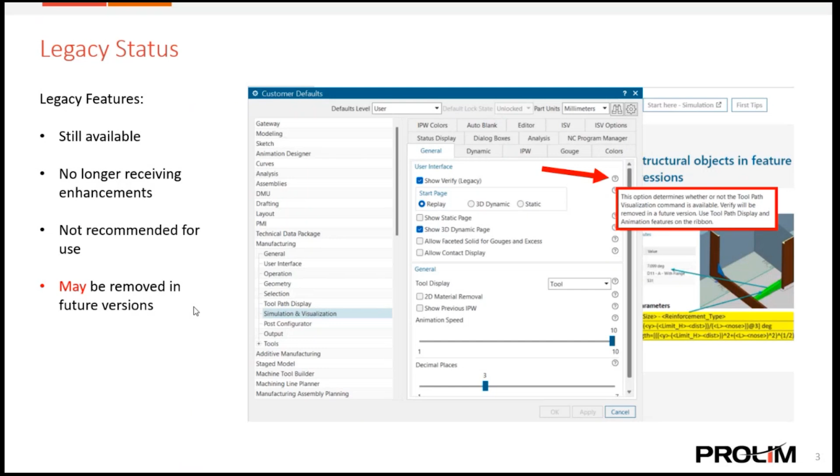Now moving on to the toolpath visualization method, we can quickly go over the current options. The initial pop-up that will appear is the replay option. Because it does not include material removal, this is the faster animation method. On the right is the 3D dynamic. This option does include the material removal and includes more options to account for that.

I will go over these options more in depth next, so to briefly introduce the common options between replay and 3D dynamic: we have path listing, which lists 9 path motions at a time, a list slider to go between the different path motions, a feed rate display, a tool display, a toolpath display with the number of motions, an animation speed slider, and the animation controls.

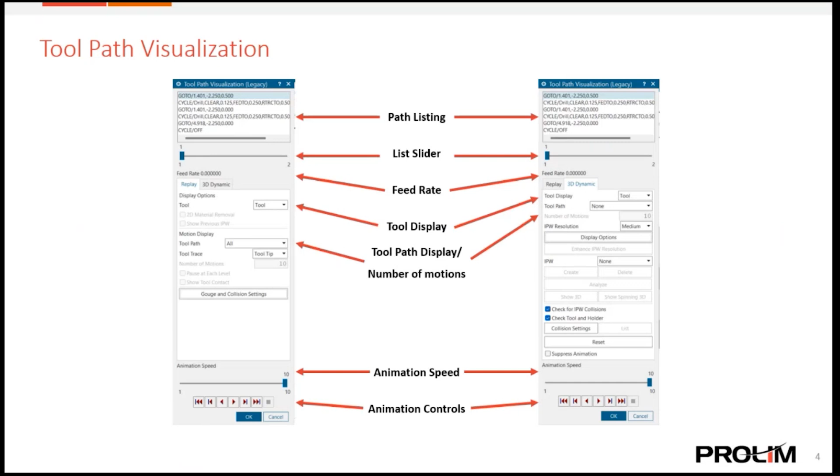Now we will view this in NX. Now that I have NX open, let's begin by locating the legacy toolpath display.

As long as the toolpath verify is left on in the customer defaults, it can be found by selecting an operation under Home, Operations, Verify Toolpath, or by right-selecting the operation, dropping down Toolpath and selecting Verify. Or when editing an operation, it can be found in the Actions under Verify.

So let's open this up and take a look at the options one more time. Here we have the path listing with the path listing slider.

And under Replay, we have an option for the tool display and the toolpath display. We also have gouge and collision settings, where we can check for gouges and check for collisions against the tool and holder. And we also have tool shape for checking, where we can change it from tool parameters to a solid assembly. We can also change the gouge check stock from automatic to user defined.

And we can display the gouges and list them when finished. Under 3D dynamic, we have the same tool display and the toolpath display. We also have options for the IPW resolution and its display options.

The IPW can also be saved out either with the operation or with the component. It can be created, deleted, or analyzed. And we can show as 3D or show as spinning 3D.

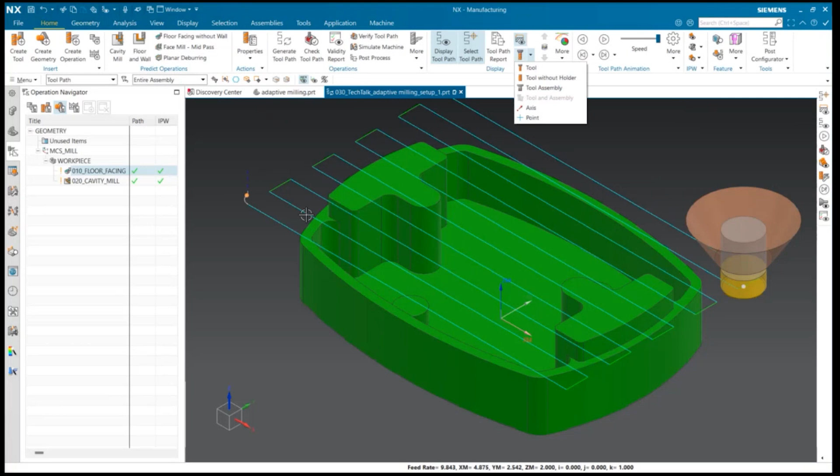Along with this is a toggle to show the non-cutting moves. So here we can see a non-cutting move in which it retracts upwards. I can select this and it goes away.

Over here is an option for more options. The More tab shows options for different toolpath color schemes and toolpath selection options. So we can do motion type, operation, tool. We can configure the toolpath and its colors. And then here's snap options and point displays.

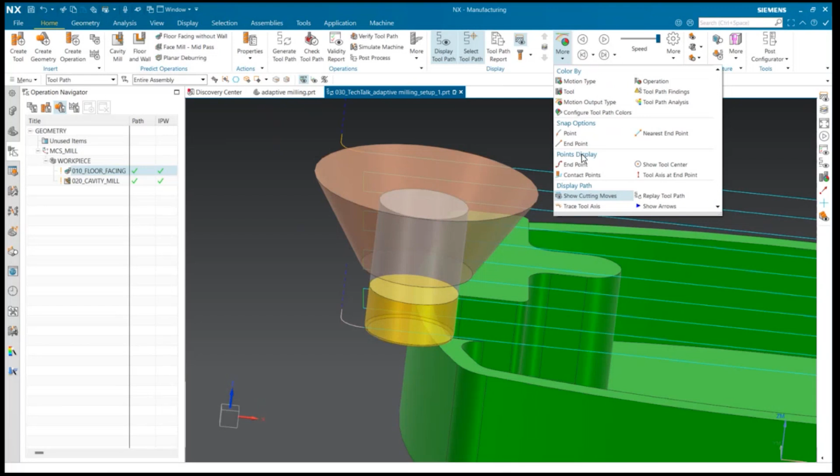Now I would like to quickly go over how you can customize the galleries for personal preference. This can be done by right-selecting in the gallery and pressing Customize. From here, the icons can be rearranged, renamed, and resized. This includes moving them out of drop-downs.

So here I can rename it, I can resize it. And I did this by right-selecting the icon while in customizing. I can also drag it over, and I can choose whether or not it displays its label.

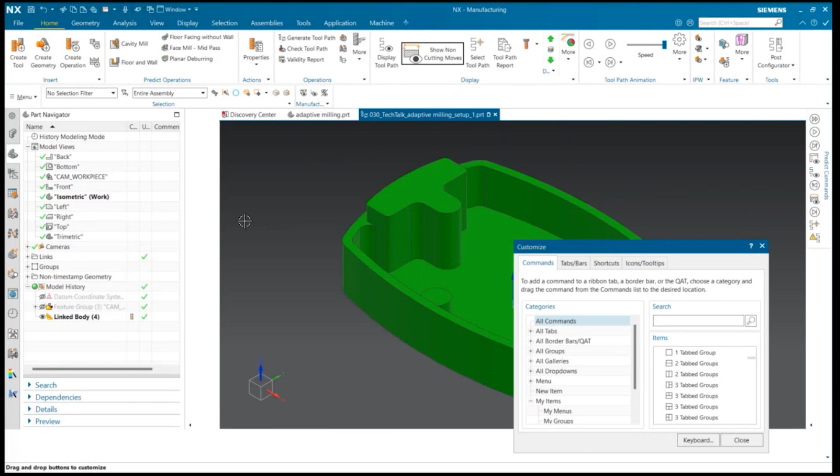As for now, I'm going to reset the ribbon back to Cam Advanced, just so I can map the features over and we're all on the same page.

Now that I reset my Home tab, I would like to briefly map all of the legacy options onto the current method. I'll begin by going to an operation and selecting Verify Toolpath.

Underneath Replay, we have the Tool Display, which can be found in the Display options. 2D Material Removal, which can be found in the second dropdown.

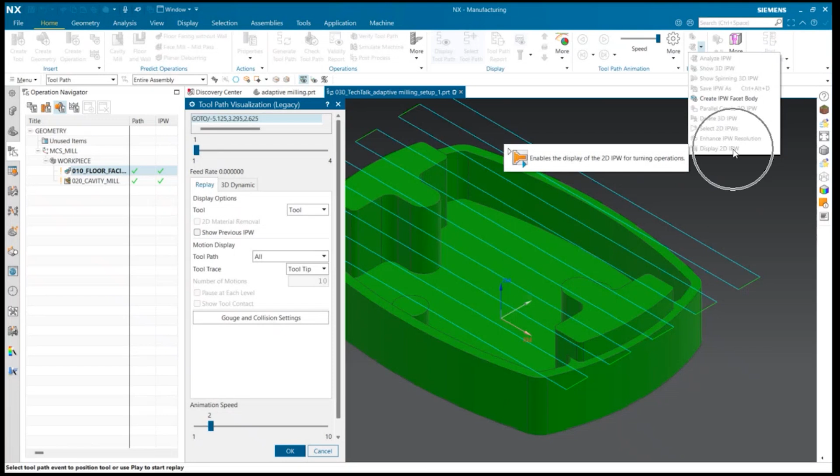And Gouge and Collision Settings, which can now be found in the Check Toolpath, which I will go over later in the Tech Talk.

For 3D Dynamic, we have the same Tool Display and an IPW resolution, which can now be found underneath this dropdown.

We also have display options, which are now found in the customer defaults. The IPW can still be saved using the second dropdown underneath Save IPW.

An option to check for IPW collisions and check tool and holder are also found in the Check Toolpath. And finally, at the very bottom, we have the Animation Speed slider, which is underneath Toolpath Animation, and the Animation Controls found in the same location.

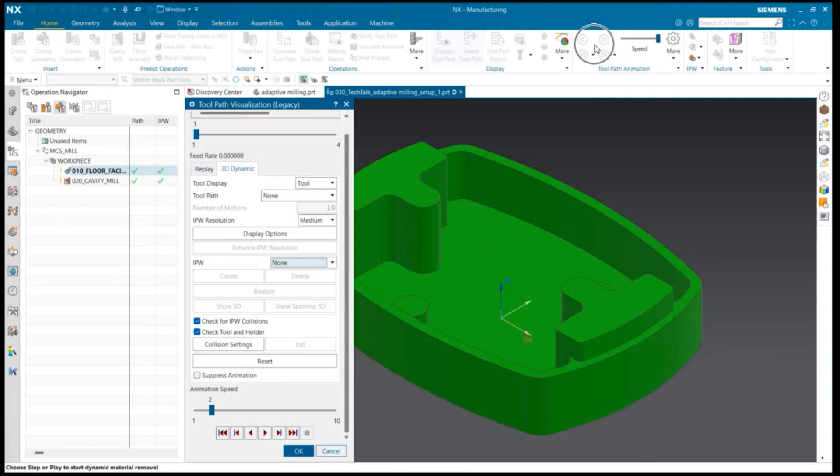Now let's move on to see how to verify against any gouge or collision. This new method involves using the Check Toolpath and Toolpath report, along with the Validity report. Starting with the Validity report, this feature will display checkboxes that will provide information as to whether gouging or other criteria have occurred within a specific operation.

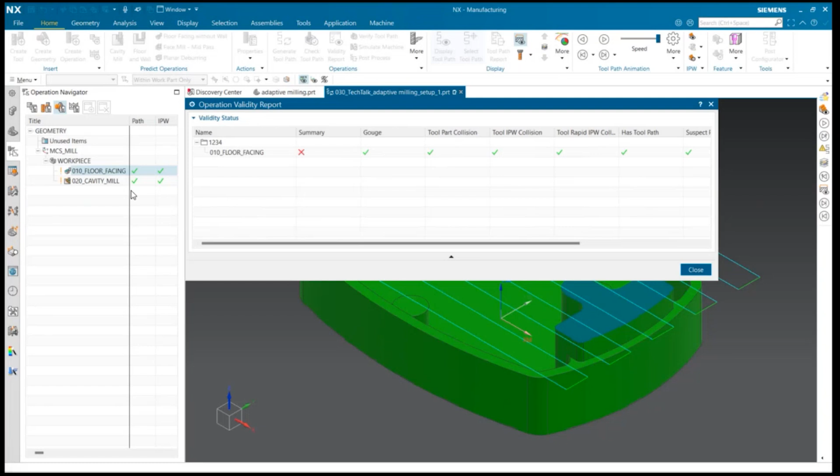This can be used to quickly monitor the status of multiple operations. So here we can see we don't have feeds and speeds. There is not a robot, so robot rules do not apply, but that would not fail our summary in this instance. Here I can also select the second operation, and it will show me the same status.

I can also select the group of operations, and I can see whether or not the entire group has failed and where it has passed altogether.

After using a validity report, if any criteria is not met, whether it fails or it is unknown, the Check Toolpath feature will allow a specific report to be generated that will list all the findings. Let's look into this. So here we can see the Check Toolpath.

I will select the first one, and I will check it. Here we have the options from earlier, where it can gouge check against a part, and do a collision check against the IPW. Here we can change the tool shape, and we can change the gouge check stock from automatic to user defined. We can also stop when a limit has been reached.

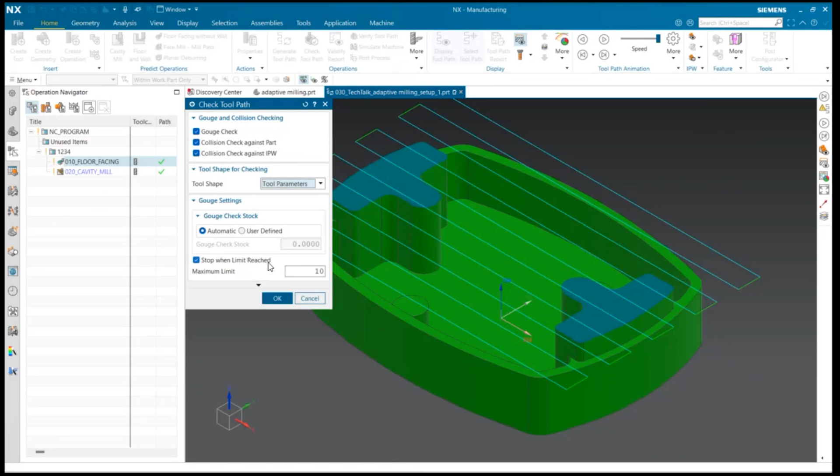So if there's 10 collisions or gouges, it will stop and it won't waste time looking into more of them. So I will select OK. And here we can see there's nothing to be dropped down. So I'll check out the second one. Here I will do a check toolpath.

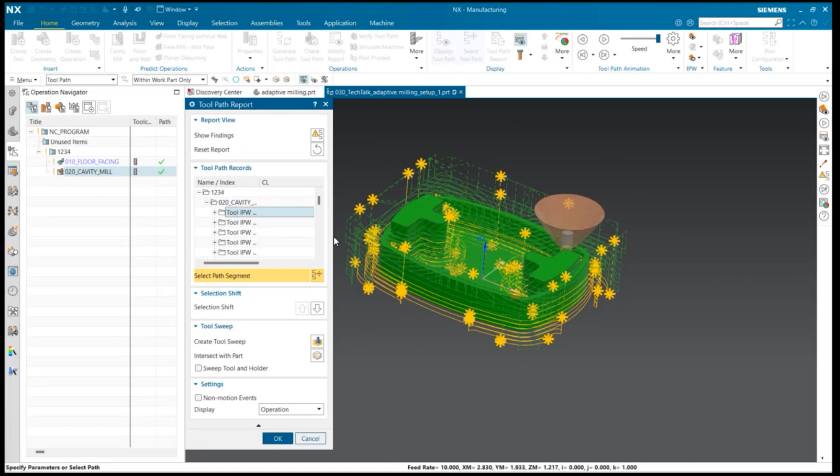I'll keep the same settings. Here, every asterisk shows a collision, and it also reports it down in specified detail in this report. I can also have it toggle in between each one, and here's where I can use my play to end of motion.

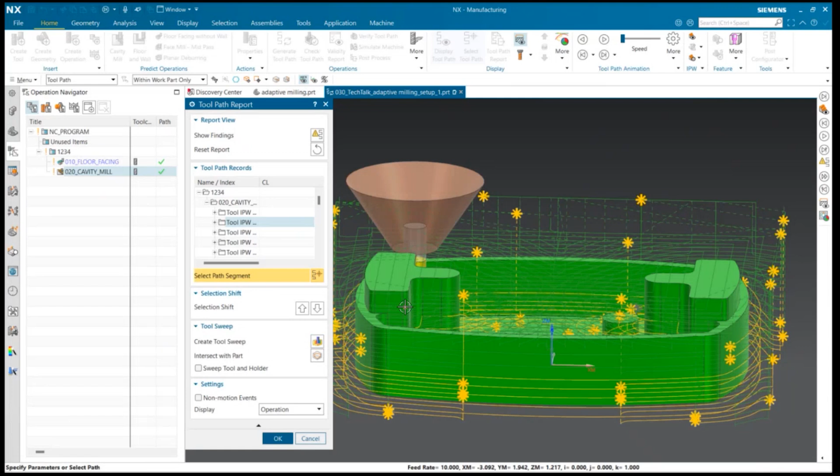So I can see where the gouge collides. I can also create a tool sweep that'll create a facet body that will highlight every single instance of a collision as a result of an intersection between the tool and the part. And I can also change the display for selected only, so I can display each collision at a time.

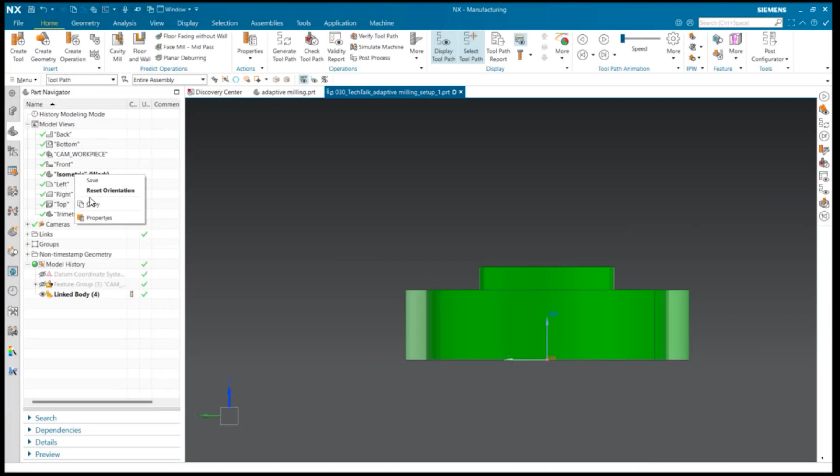For the final part of this tech talk, I would like to take the time to demonstrate how using the toolpath animation and display will allow for a smoother workflow.

I'm going to begin by going to my operation navigator, and I'll create an operation underneath floor facing. For now, I'll just call it a cavity mill, and select OK.

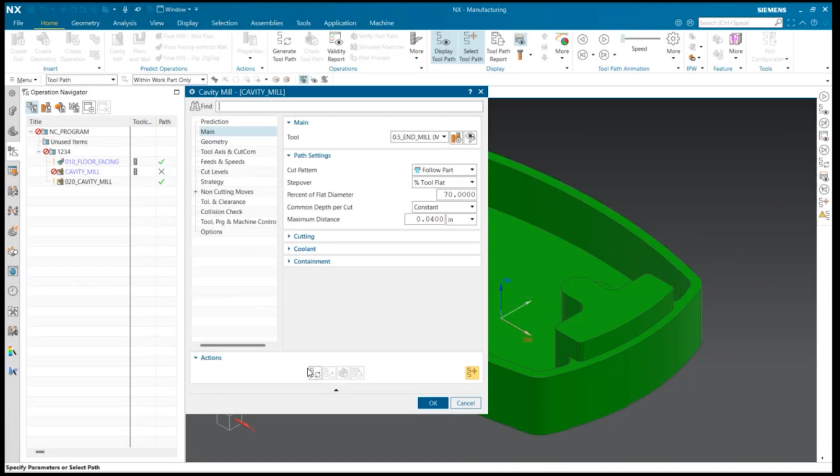The first thing you do is ensure all of your options are set properly, and you'll select generate. In doing so, you'll see that the toolpaths have been displayed right away, unless there's a collision. Here we see portions of the toolpath would have caused a collision. I'll go ahead and ignore this for now.

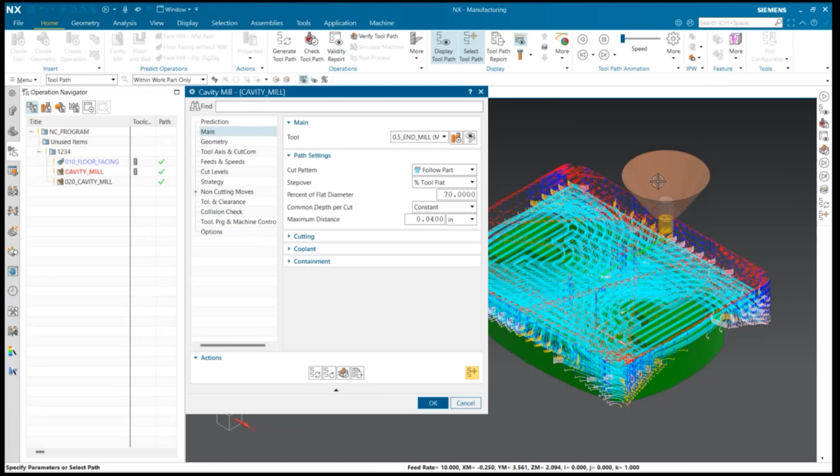Now that the toolpaths are displayed, the first thing I can do using the toolpath animation is just click play. I can also toggle this on layer by layer, and go down and up as needed.

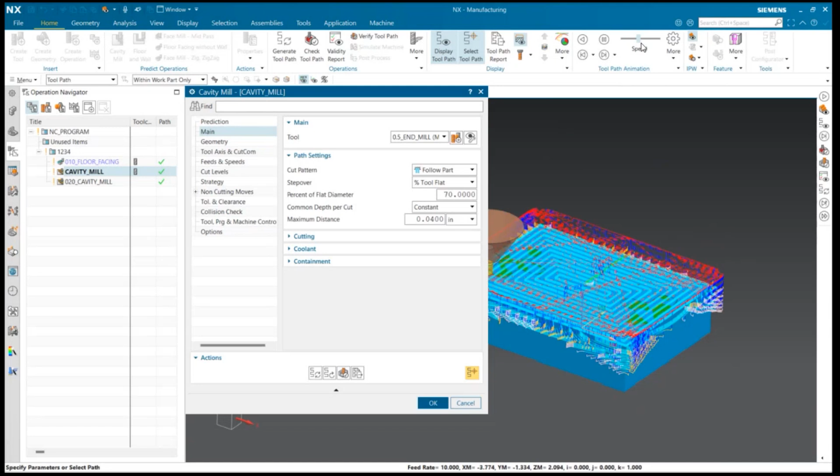Along with this, and I neglected to show it earlier, is the display IPW. In doing this, I can watch it get cut interactively. I can also choose to display the toolpath or not, or whether or not I want to hide non-cutting moves. While this is also playing, I can display the tool, as mentioned earlier.

I'll go ahead and pause this for now. Now, the legacy method of doing the same process would involve selecting verify and being taken out of your operation navigator, operation dialog box, and going to your toolpath visualization dialog box.

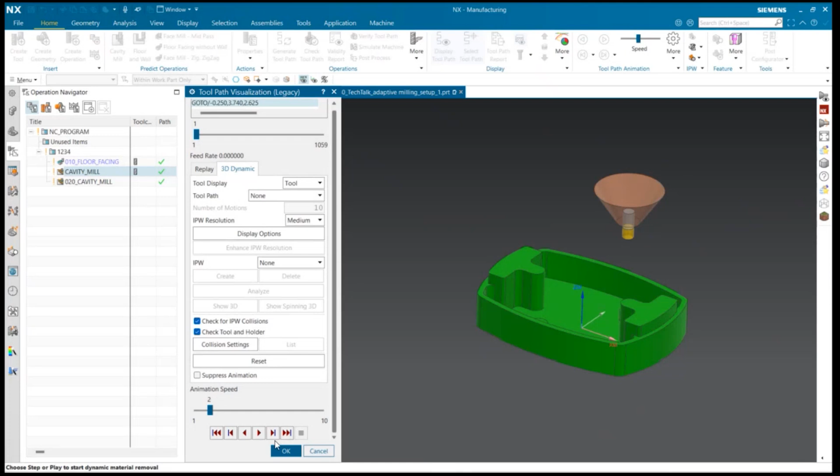Here, in order to get the IPW to display, we'll have to go to 3D Dynamic, step it one forward, adjust the speed as we'd like, and then select play.

And then to exit this and go back to your operation, you'll have to stop it, select OK, and then you're back.

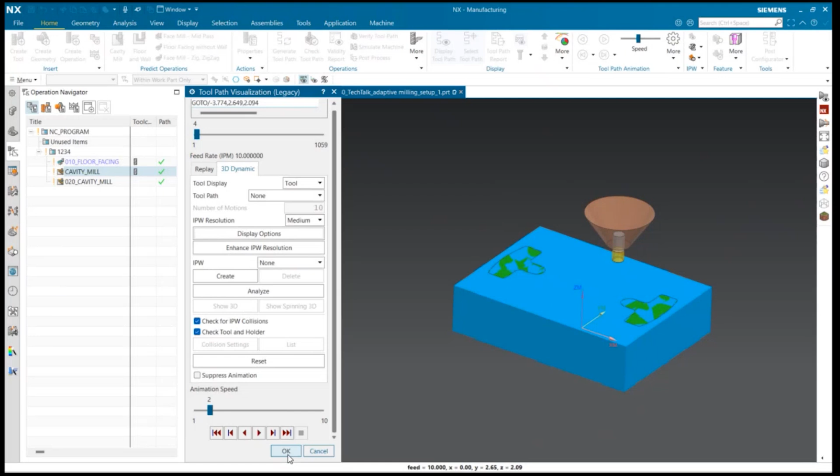Now, I'm going to get rid of this operation. Let's say that we already have the operations available and we just want to do a simple gouge check.

The legacy method involves verifying your program. So go toolpath, verify. Ensure that your collision settings is pause on collision. And then turn your speed up.

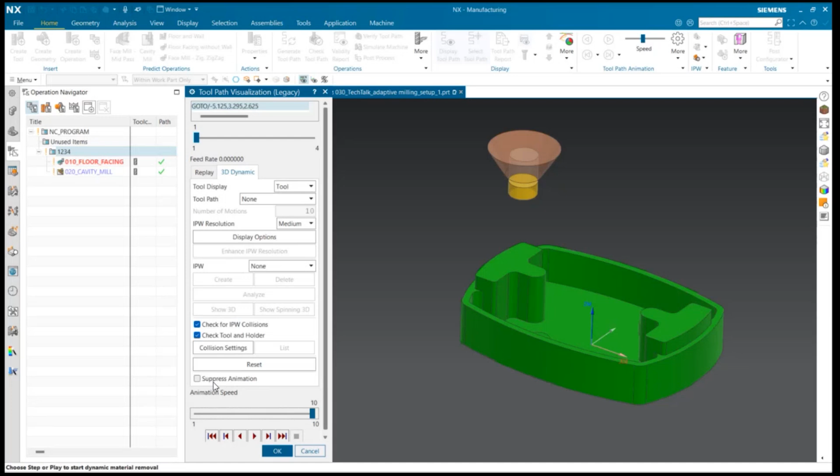You can choose to suppress your animation or not. Suppressing the animation will allow it to load faster. However, it won't show you the location of the collision. So for now, I'll click play.

Here we can see the holder and the IPW are colliding right here. You can go ahead and press continue. And it'll continue showing me the different collisions, highlighting the tool in red and telling me what's colliding. So I'll go ahead and press stop.

The new method of doing this involves selecting your program and selecting check toolpath. I guess initially you can do a validity report, and here we can see nothing's been checked yet.

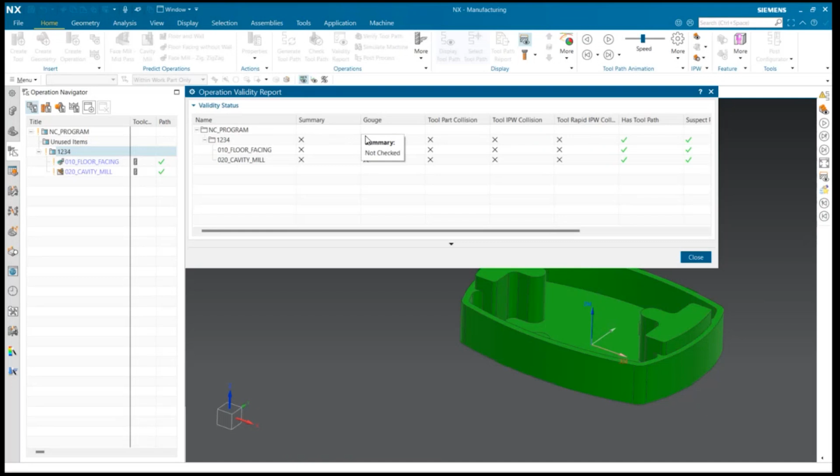So I'll run a check toolpath. Here we'll do the cavity mill right away. I'll select gouge check and collision check against the part and IPW, and I'll select OK.

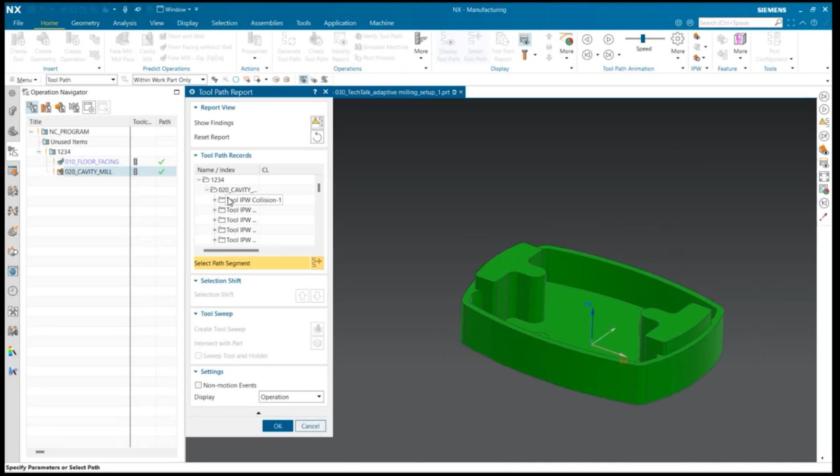Here you can see every single collision, and I can interactively go to the location. I can even toggle it on to selected only. Here it'll jump to each location.

I can use this play next, and it'll show me the single motion at which it occurs. So here I can slow it down, zoom in, and play next.

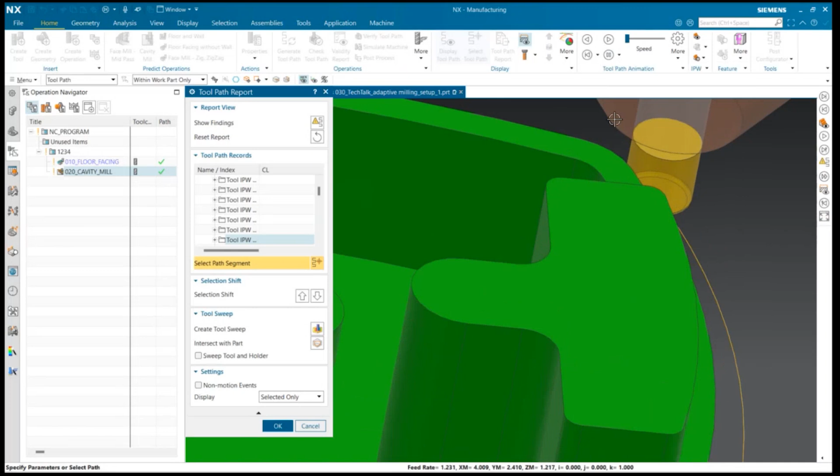And in this instance, I can see that the holder and the part itself are having a gouge. So for this specific instance, I know that it's because my tool is not long enough. So I'll go ahead and click OK.

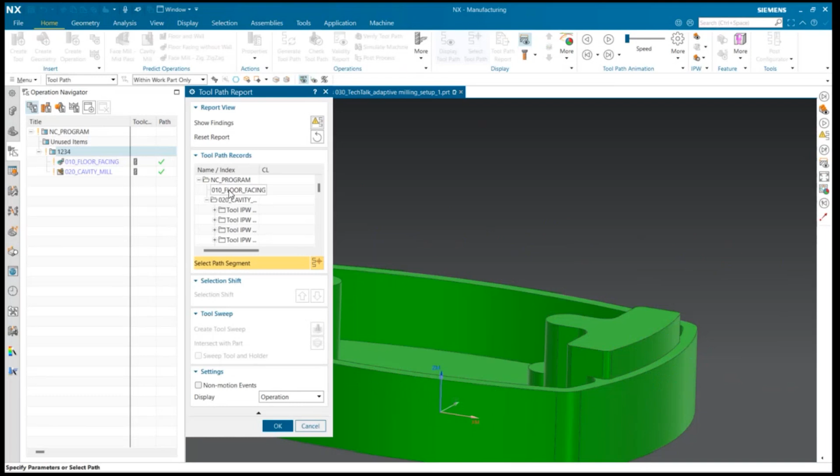While I'm at it, I'm going to run a check toolpath on the entire operation. And here I'll select OK. Here my floor facing appears good, so it is just my cavity mill.

My validity report also says that my floor facing is good, just for a second method of verification. My cavity mill has tool part collision and tool IPW collision. At the very end, they all fail the robot rules, but there is no robot applied, so it still allows it to pass.

So going back to this instance, I'll go ahead and change my tool to be a longer end mill, which means I'll go ahead and generate this.

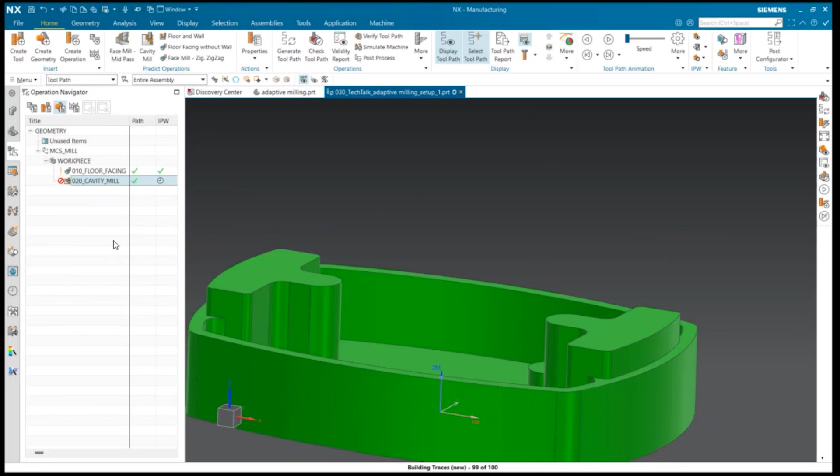And again, doing the legacy method, I can go toolpath, verify. I'm already on pause on collision, so I'll click play. And here we can see it load. It appears good, so I'll click OK.

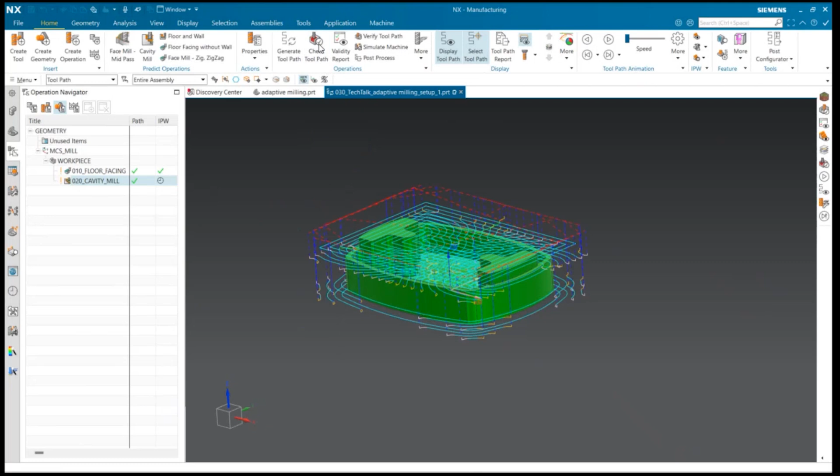So for now, I'll run the check toolpath on it. And we can also see that there's no errors here. So I'll go ahead and click OK.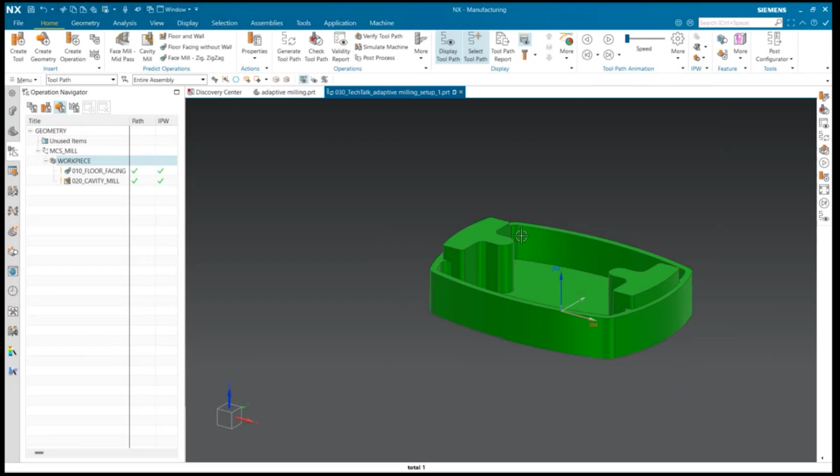And finally, I'll run my validity report. I'll select my workpiece, and here we can see my floor facing is still good, along with my cavity mill. So knowing this, I know that the code is good to post and run on the shop floor.